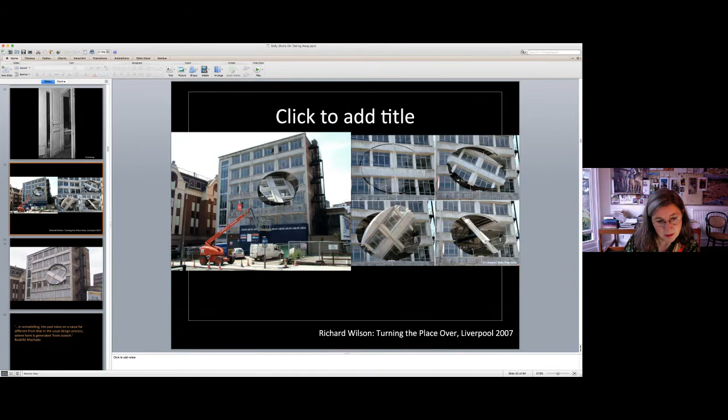This is a video of it. Sorry about that, it's because I changed computers. So it's not happy.

Come on. I have to admit, I don't know where we are now.

Now we are seeing the document, the presentation document, with the slides on the left. Now we are seeing it as full screen. Right. Sorry about that. I told you we might be a bit unlucky with this very, very old computer that I moved the presentation onto.

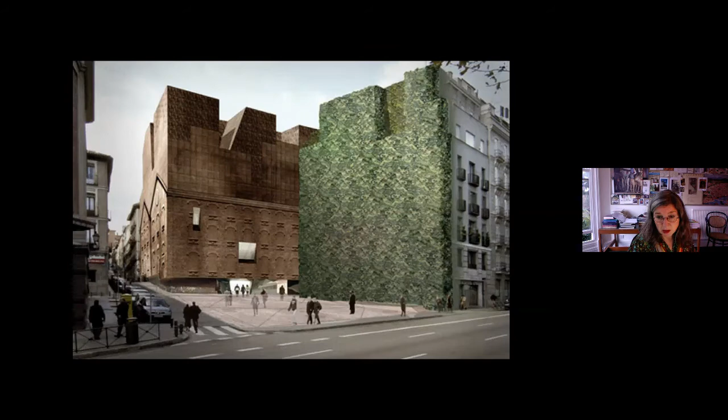In Madrid, the Caixa Forum by Herzog and de Meuron, which was once a brick power station, was converted into a museum in 2008. This project, and this is the photo montage created by the architects, contains two brutal examples of subtraction.

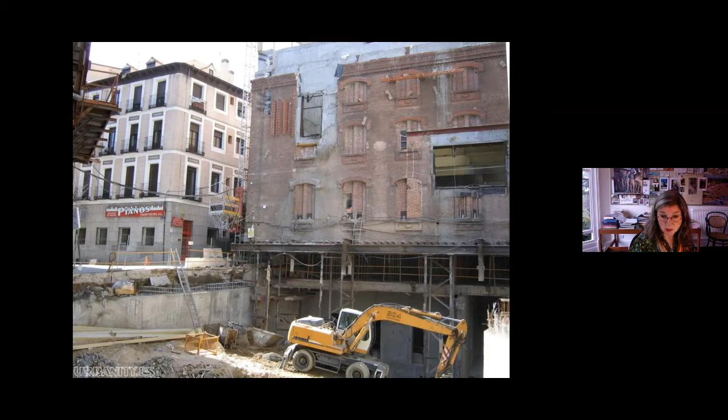The first was the extraordinary act of removing the whole of the ground floor. You can see the works to the building, and you can see where the ground floor was completely removed from the building.

The second destructive act was to demolish any extraneous structures immediately in front of the museum to create a new public space. So there's two acts here: the first, obviously, is incredibly dramatic, to remove the ground floor, but the second was to create the space. That again looks like nothing much is being done. We take this public space for granted, but by removing that, we can stand back and see the impact of the whole building.

The removal of the base of the building allows this new plaza to flow into the museum, thus creating spaces that are neither inside nor outside. They are under the building, but they are not enclosed by it.

This is a view from under the building, under this massive cantilever of hovering extreme weight. The building appears to defy gravity. It is full of wonder, ambiguity and whimsy.

The architects have, through the visual removal of the intrinsic elements necessary for the structural stability of the building, and the razing of the surrounding buildings, commented upon the congested nature of the environment, the limited heaviness of the industrial society that created the buildings, and the importance of the cultural industry to 21st century societies.

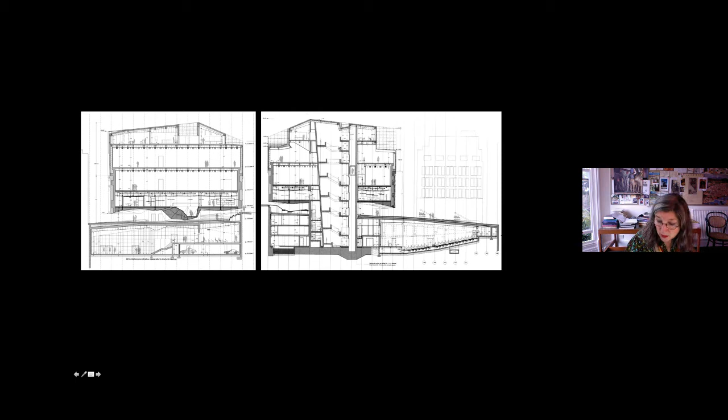What's very interesting about this is, again, cutting holes, taking things away. It seems sort of quite minor to remove, block in. So the first thing they did was block in all of these holes, or all of these windows, using reclaimed bricks, and then cut new windows in the facade. These new windows reflect the new use inside.

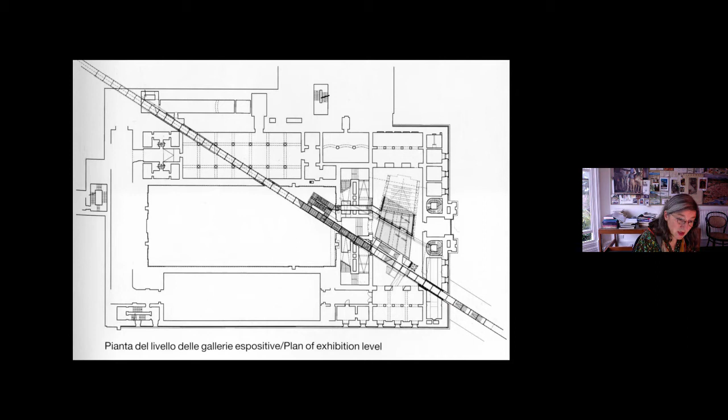This 21st century shard slices through. It begins as an entrance at the most northerly corner - we can see here, an entrance here - and brutally and uncompromisingly cuts through the rooms and the courtyard and emerges into the massive open space at the centre of the horseshoe building.

This blade-like element lacerates the space to create a central circulation route through the building. It's not a subtle statement, as this was not the time nor the place for sensitive reappraisals or careful installations. The form of the new building directly counterpoints the old.

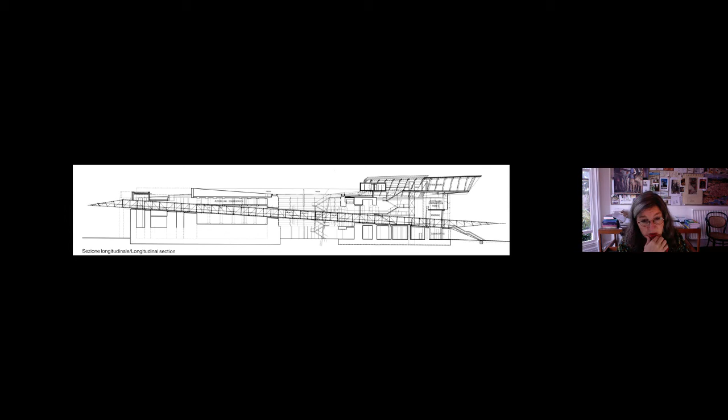The examples we've been looking at so far have been very sympathetic in a way - they've worked with the qualities of the existing building and tried to expose them. This is a project working in exactly the opposite way. It's a bold proclamation on the history of the building and the relationship with the new function. It's not sensitive, and it's not subtle, and deliberately so.

We can see how it runs diagonally through the orthogonal structure. It's 130 metres long, this corridor, and rises through the space and shoots out to the back. You can see the way it's cut the building, and these are almost reminiscent of Matta Clark, the artist we were talking about at the beginning of the lecture, who just cut through buildings and left the edges raw.

It's deliberate that the edges of this space have been left raw, have been left uncleaned. There isn't the sense of making it beautiful and nice. It's deliberately left very, very raw.

Again, this is a statement about the Germans' memories of the Third Reich and the importance not only to remember it so that it never happens again, but also in a sense an apology for what has happened. It's a nice quote from Domenig: 'I used oblique signs against the existing symmetry and ideological significance, and to contrast the heaviness of the concrete, brick and granite, I turned to lighter materials - glass, steel and aluminium. The historic walls are left in their original state without being touched by the new work.'

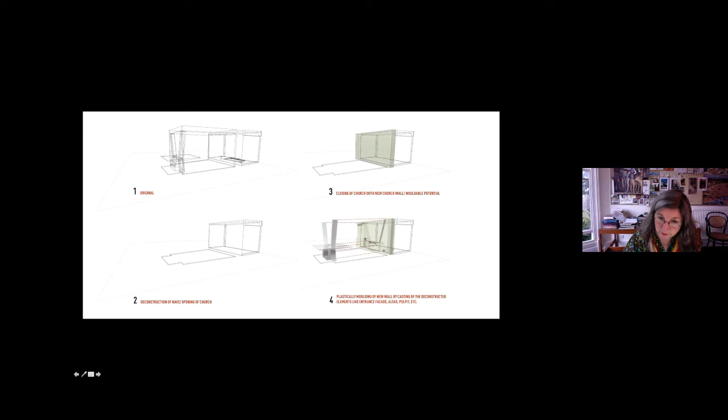You can see that in how the relief is modelled within this end wall. So you can see this is the bit which is being removed, and again we've got the tower. The memory of what was there is inscribed on the wall itself - we can see here the original altar, and it's all just been pushed in, crushed into this.

It's something that visually symbolised what had been removed and reflected the separated, unneeded element. And thus, the building was cut down to an appropriate size.

Oh, we can see how it is reused. This is the old altar. Other photographs have it looking at this original window, but the sense of cutting it down to size using decorative and structural work. And what's really nice as well is that this is the old nave of the church.

As a sort of pattern on the ground, again, is the memory of the pews, so you can see how they were once laid out. It's now become a playground, children's playground, or somewhere for people to meet. The memory, almost like a basketball court, has been laid out within the materials of the ground itself, and we can see people playing in it.

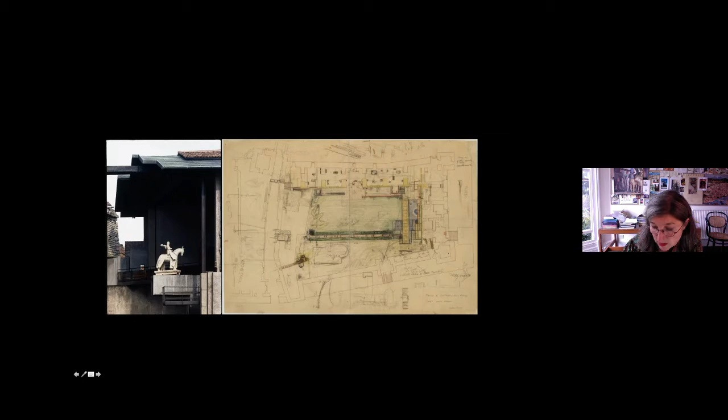So Cangrande was once situated in the front of the building here, and he moved it to a pivotal point just here. So a couple of things we can talk about.

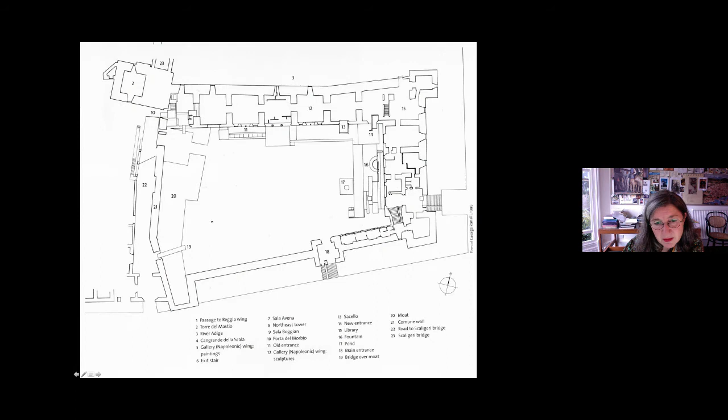The first is that sense of slightly disconnecting the facade. So what's happening is, can I go back to that one? It's a slightly better image. This is a facade, was a false facade that was put on in about 1923.

And what Scarpa did was visually slightly disconnect it from the buildings. You can see that by this false wall that he puts behind that, behind here and behind these windows. And because he was a modernist architect, there's a sense of movement to this.

So the new windows don't quite line up with the windows in the original building. And therefore you get the impression that one is slipping behind the two, which is that sense of architectural promenade, one of the most important things about modernist architecture.

And you see that in the work of people like Mies van der Rohe, and the Barcelona Pavilion, where the space is never static, as opposed to classical architecture, where the space is always static.

So there's a sense of movement within here, which is incredibly important. And you can see that the way these window frames don't quite line up, and again, that's accentuated here with this new space behind, so the front facade and behind that facade seem slightly disconnected.

That sense of disconnection is accentuated with the entrance itself, which instead of being a straight door is a screen which seems to welcome you into the building. And this disconnection between the building and the bridge or these walls.